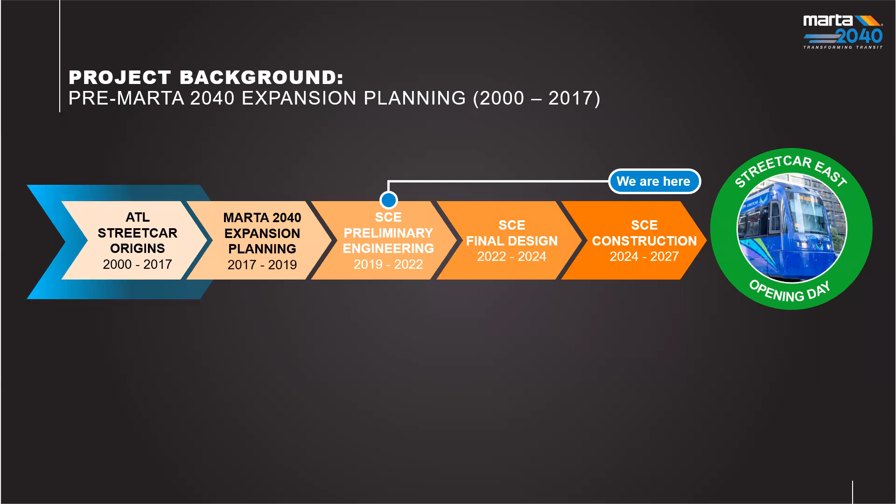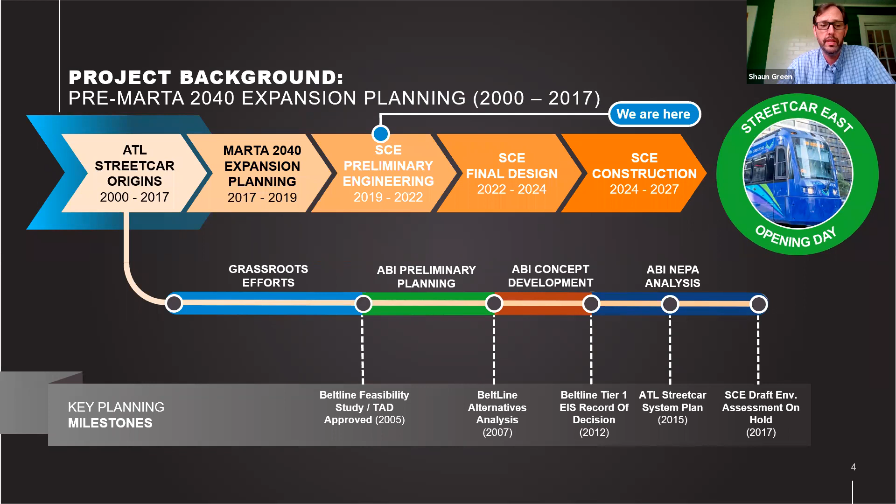It's kind of a busy slide, but there's a lot of information we wanted to make sure everybody understands as to what ABI is participating in. ABI is partnering with the City of Atlanta and MARTA on delivering this project. But to get where we are, we came from somewhere, and that's really what I want to talk about today.

It started off as a graduate student research thesis about 20 years ago. The project gained so much grassroots support that ultimately it became a policy of the City of Atlanta to implement the BeltLine program of projects. All of the BeltLine program of projects—the trails, the parks, the affordable housing, the jobs—all of that is hung off of the concept of the transit system. It's the spine, the fundamental element of the BeltLine program of projects.

We've done a bunch of feasibility studies and alternatives analysis. We did a lot of community involvement and engagement, and we still do all of that. But now we're working with MARTA specifically to get to the next part of this, which is now funded, and we're really, really excited about that.

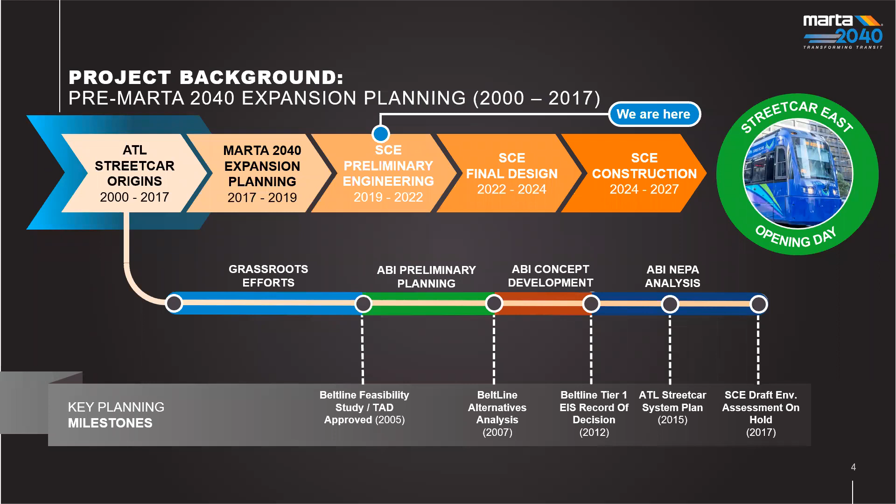So what I want to do now is move to some of the more recent events that have taken place. As many of you know, in 2016 a half-penny sales tax was passed, providing funding for many of the transit projects across the City of Atlanta. The Streetcar East Extension project was one of those projects eligible to receive funding.

Over the course of two years, MARTA has gone through a complex planning process which included significant public outreach to determine how the transit expansion program would be sequenced in a financially feasible way. It was through this process that the Streetcar East Expansion project was prioritized, and a funding plan was established to complete the project.

And that brings us where we are today. The Streetcar East project is currently in the preliminary engineering phase. During this time frame, MARTA has been in the process of validating all the previous work performed by COA, the City of Atlanta, and ABI on the project.

We have established a preferred alignment, a proposed preferred alignment for the project. We have also validated that the vehicle maintenance facility can accommodate the proposed expansion with some modifications. As you know, the current maintenance facility is not very large, but we do operate out of it, and it would have to be modified going forward.

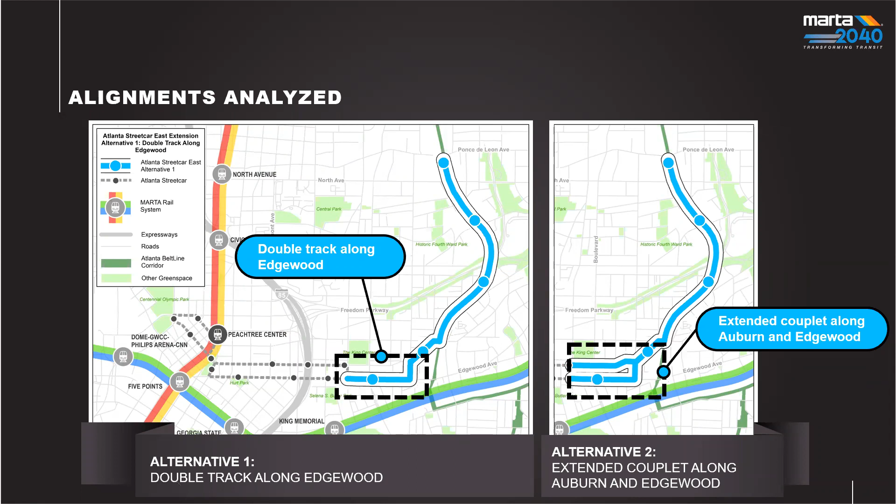Because we were early enough along in the process, we were able to take a relatively high level look at how these two projects compared. We were not so far along in detailed engineering, so this wasn't a 7-page analysis, but we were looking at things like stakeholder feedback. There are different turns, some tighter than others. Were we creating additional noise? Was one route particularly faster or slower than the other?

On a scale, were the two relatively similar or relatively different when it came to construction impacts? We had new information like underground utility surveys, so we had a better sense of whether you had a major fiber line close to the surface. And then even thinking about maintenance requirements - once you have significant turns, if you have too many things that differ between routes, you have to treat the vehicles differently than if all vehicles are doing the same thing. And relative costs - are they close enough to each other within a margin of error? A lot of times you'll see projects like this where one corridor could be extremely expensive, maybe because of a utility impact, or because you have to take significant right-of-way, a parcel or something like that.

Based on where we are with the analysis right now, we found that these two projects were relatively close to each other. Auburn Avenue and Edgewood Avenue are relatively similar city streets with relatively similar utilities underground. The costs are within a margin of error. The maintenance shows very similar movements between the two. Construction impacts - while we're not quite at the point of understanding how everything would be staged - are close enough to each other that one does not outweigh the other. You're still removing or impacting 2 lanes of traffic, and you can sequence it in very specific ways to help mitigate that.

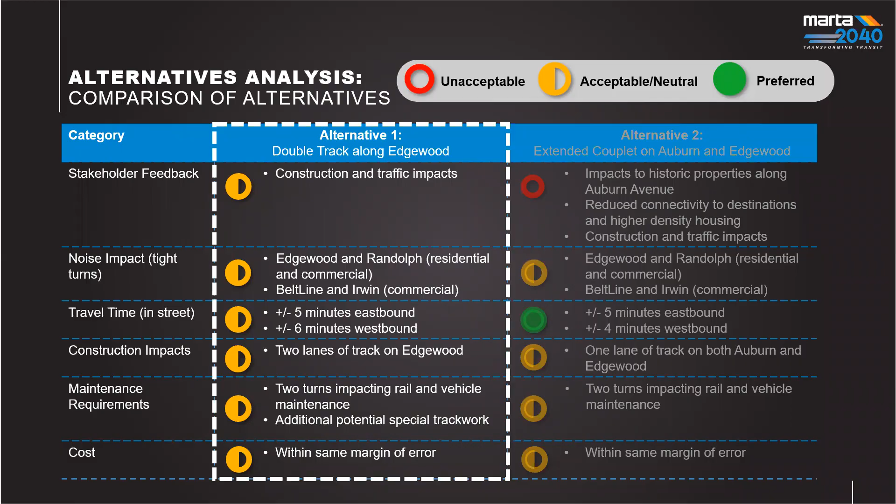Again, if you're going east from Jackson Street, you continue along Edgewood, go north on Randolph, continue northeast on Auburn, and then make that turn onto the BeltLine corridor, coming up to just around the Ponce City Market area, just south of Ponce de Leon.

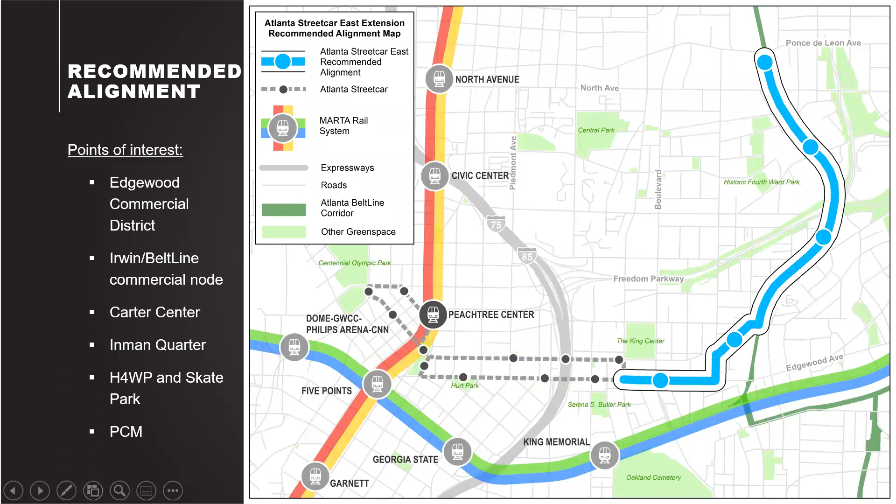We also took a look at how this alignment connected or didn't connect with the existing bus routes and other MARTA assets. What was interesting is it was relatively plainly clear that it doesn't overlap a lot. You only have 2 routes that literally touch each other from a planar perspective.

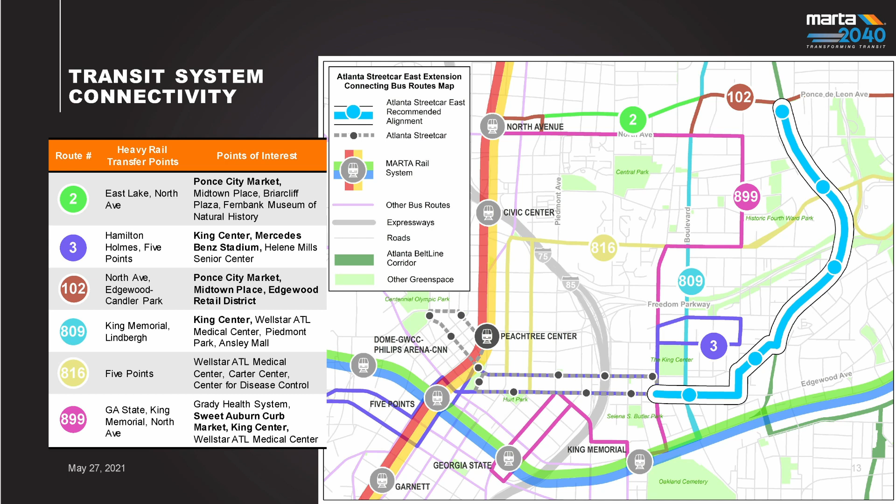The other issue, while a little weedy in technical nature, that Brian mentioned earlier, is we have verified that the existing footprint of the maintenance facility under 75/85 is sufficient to accommodate the extension of the Streetcar East Extension. That includes everything shown on the map previously, going all the way north to just south of Ponce. That's very important. It's not to say MARTA isn't continuing to think about other expansions of the vehicle maintenance facility, or even finding other facilities, depending on what the next expansion of the streetcar line is. But it is critical to say this is not a requirement. We do not have to expand this site to accommodate this extension.

So that could have been a pretty significant hurdle. I think the whole team was confident it would work, but we had to make sure that it would. We had to validate that so that we weren't a year or two down the line having to put the project on hold just for the sake of finding new real estate to store and maintain our vehicles.

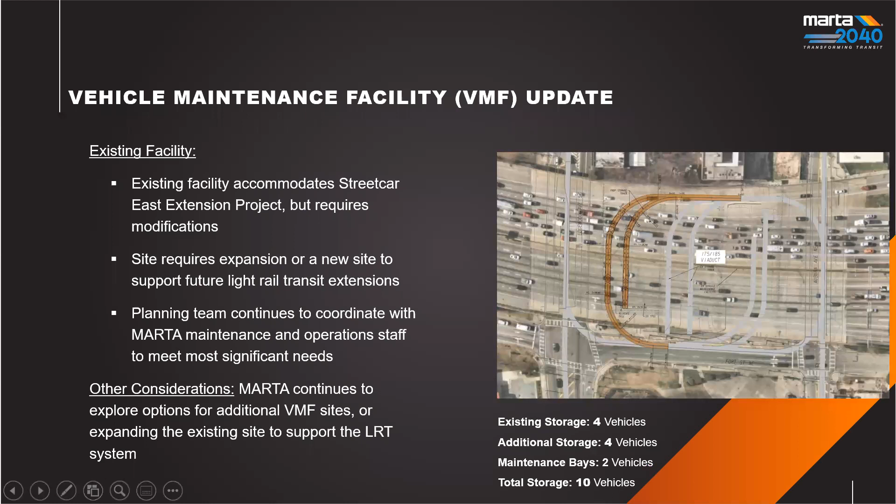Now, just fundamentally, we wanted to remind everyone that this project continues to meet the original intention of the BeltLine needs and modes. This also meets the original criteria set forth in partnership between the City of Atlanta and MARTA when the half-penny T-SPLOST was established. The priorities there for any of these projects were focusing on safety and increased access throughout the City of Atlanta, expanding mobility for all potential users, and extending the value of the existing streetcar.

While that wasn't an express guideline or guiding principle of the halfpenny projects, it's definitely something we've all heard from residents about the existing streetcar. We want to make sure that asset is leveraged and improved upon, but also that we're not just throwing a streetcar in the ground for the sake of it—that this project really reacts to projected growth and development along the corridor, connecting folks that live in town at higher densities to higher density areas that have jobs and destinations like downtown Atlanta.

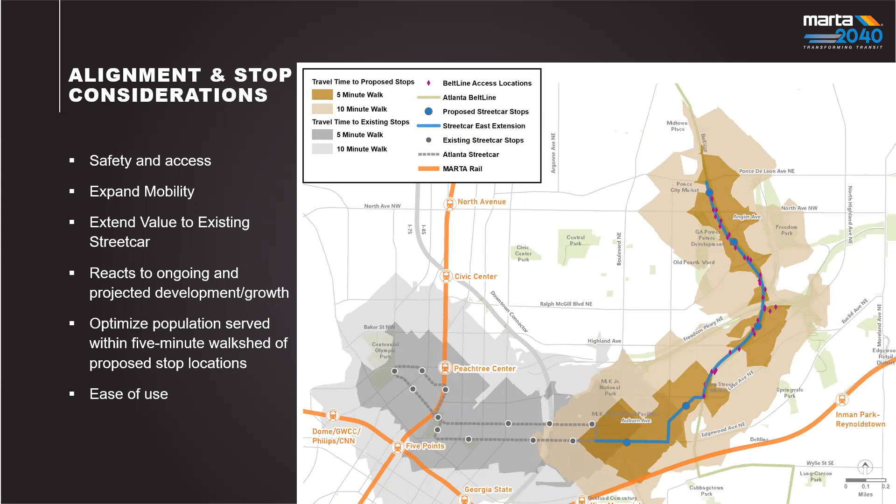Brian mentioned that we'll be asking in the survey some quantitative and ranked questions about where you'd like to see stations and stops. These stops will generally have the same level of design that we might see on the existing streetcar right now, particularly along Edgewood and Auburn. We do not yet have the details of what those station area designs will look like beyond that indicator. We also haven't decided if the streetcar station areas will look particularly different along the BeltLine or not.

They have continued to be designed for the ability to extend those streetcars to that larger double car configuration along the BeltLine, similar to their original assumptions that one day this could have the higher densities that would support two trains instead of just one.

The stations were focused on ongoing and projected development and growth. We did think about where the buses were, but we also overlaid that walk shed to make sure that what exists, and where people can access the corridor, can continue to access stops. We've also continued to think about how the BeltLine is currently used and the in-street area, particularly around the Edgewood Commercial District—placemaking, potential art siting, and other amenities.

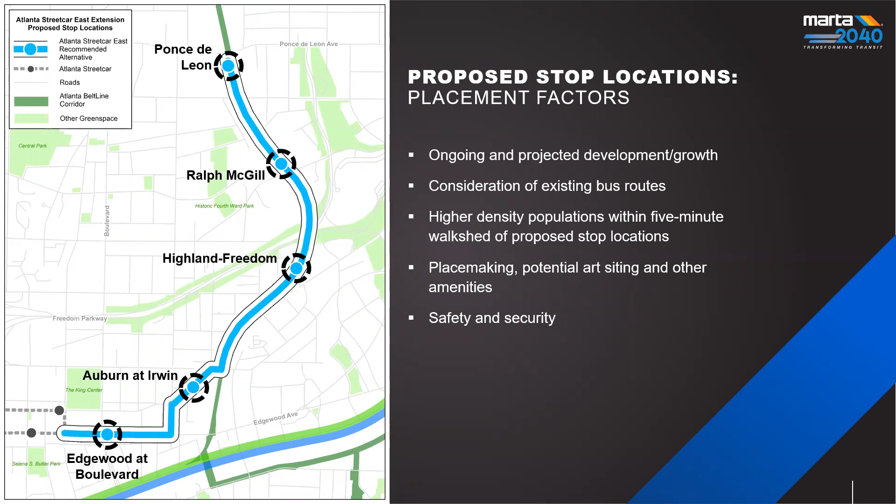We are also assuming a 10 to 15 minute headway, which means if you miss a train by 10 seconds—you get to a stop and that train pulls away as you're entering—you will have to wait no more than 9 minutes and 50 seconds, or 14 minutes and 50 seconds, until the next train shows up.

So we're playing around with these ideas of 10 to 15 minute headways to determine how many vehicles we need, and the cost to operate and maintain the system over its lifespan. It's very important, but MARTA's guidelines for this type of service do not go beyond that 15-minute headway. So they continue to work on the existing streetcar system too, to try and figure out how we might be able to start seeing similar headways there.

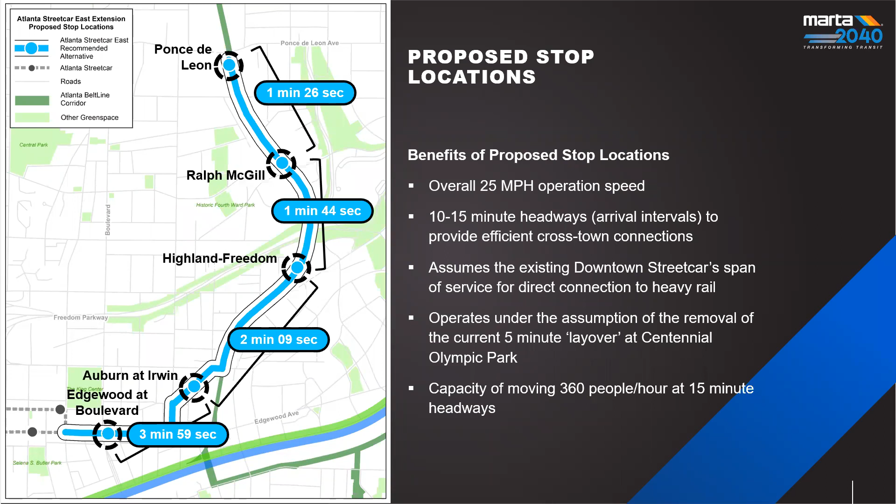And some of this, there's sort of the devil in the details on that operating side of things as well—where these vehicles lay over, where they switch drivers, things like that. Those are all going to be very much a part of those early stages of design as we go through the next 12 to 18 months.

So over the next couple of slides, I'm going to start looking in a little bit more detail at the cross sections. I'll start with areas zoomed in along the Beltline, and a plan view, looking aerially down at the alignment.

We are still very early on in the process, so there are a lot of things you'll hear me say we're still figuring out. Part of this is we want you to know what we're still figuring out, and we want you to tell us how you feel about that. If you have any initial thoughts or ideas, they're always welcome, but really this is about getting you ready for the next round of engagement. That will be in the fall timeframe of this year, so it won't be too long before we come back out to the community to talk and give you more defined options. We just wanted to make sure you understood where we are, what we're thinking about, and how things might have changed since the last time you heard from ABI.

I am going to pause a little bit, particularly on these plan view slides, to give you an opportunity to digest it in front of your computer. I know there are a lot of questions that have already come in today and over the last couple of weeks. So if you don't hear me speak for a second, that's only because I want you to have an opportunity to see it, think about it, and jot down any notes for yourself if you want to.

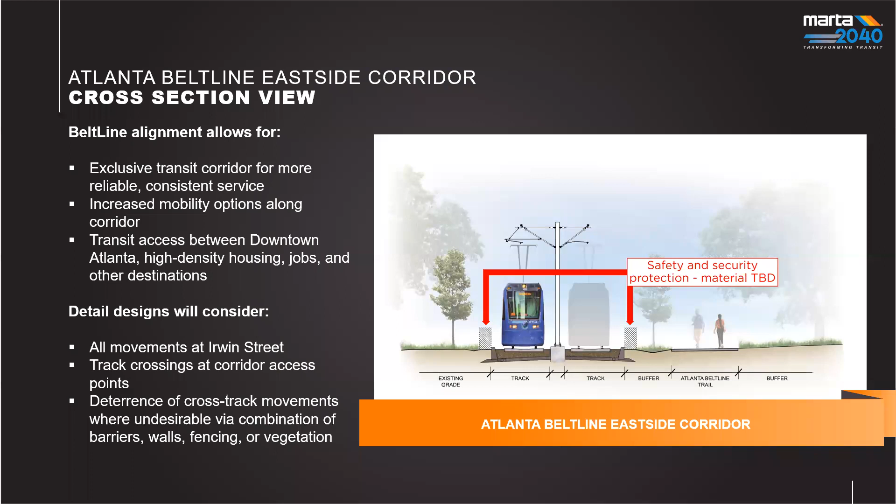But we also want to be very direct with the community. Like Brian said, there are going to be changes to the environment on the Beltline corridor. You're going to see more controlled access to the development surrounding it, particularly on the west side. You'll have limited access to the stairs at North Avenue, and impacts to what you're used to seeing, both from the shed at Ponce City Market and from the trail into town. Right now we're still assuming similar technology, this is a streetcar, you're going to have those overhead electrical poles. The views are just going to be a little bit different.

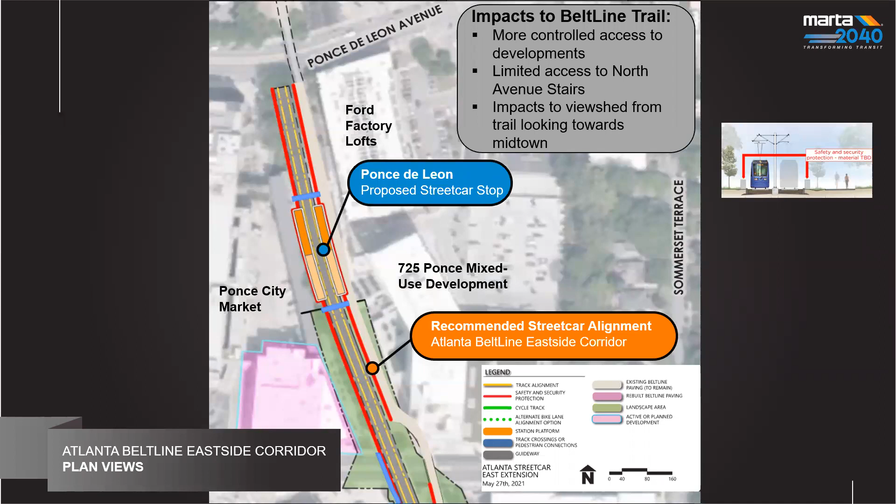We used to have the large ramp from the trail down to the Beltline. I know New City has been constructing, I believe they've finished construction of the new access point to accommodate their new development, but it will be a little more controlled than before. Impacts to the view shed similarly, you're still going to have transit between the trail and Fourth Ward, but you'll also have a very different view because of adjacent development. So there's a lot of changes happening, not only affiliated with building transit on the Beltline corridor.

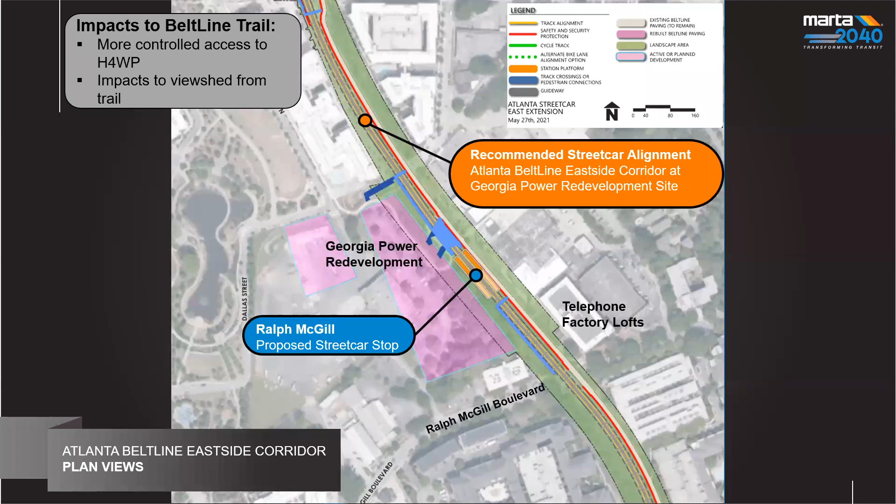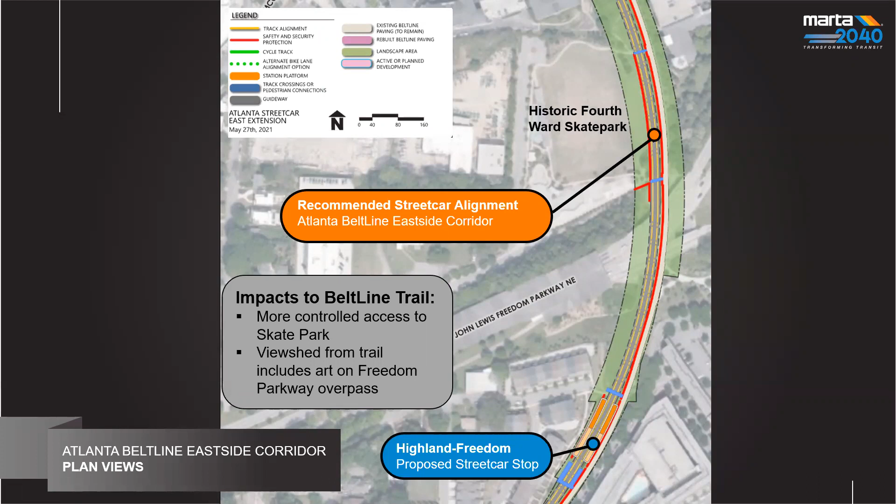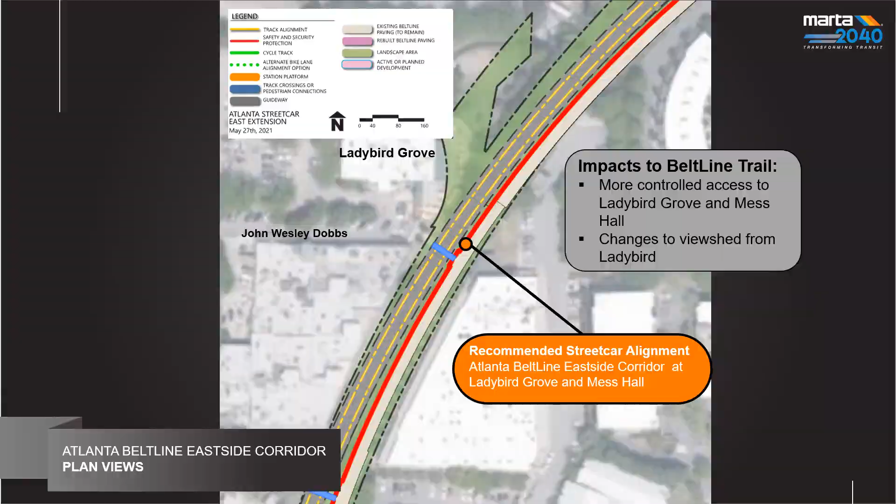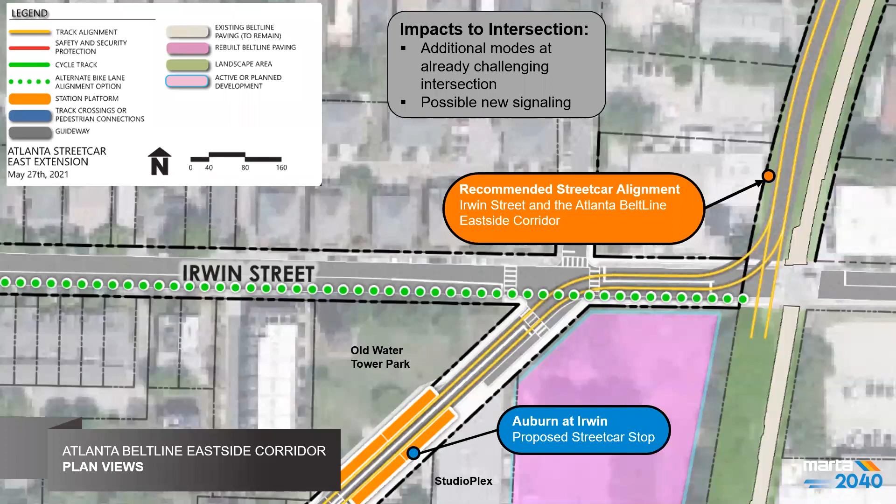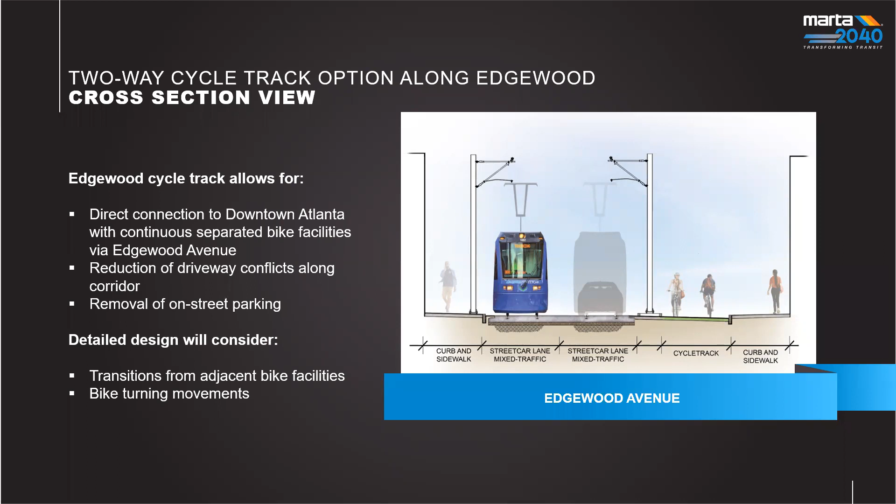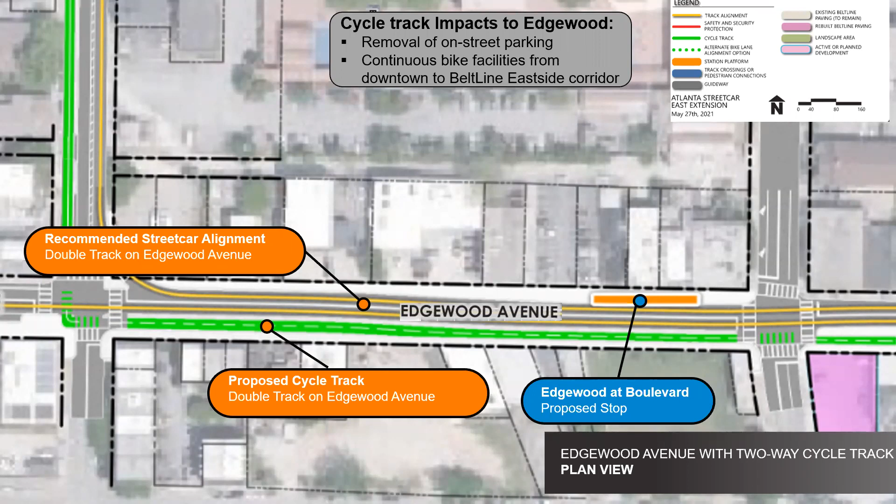It's a very interesting concept that actually started coming to this team's mind after we understood that the city was very interested in shifting priorities along this corridor, finding ways to either widen the sidewalk or reprioritize with striping in the near term. How do you reprioritize and protect those pedestrians and cyclists along such a busy corridor from folks that are not just in a car? So again, this is another section where we've asked, do you support reducing, limiting, or removing access to certain blocks from cars? In the survey, there is an option to say, I do not support this. We definitely appreciate that there are going to be a lot of strong opinions about this. A lot of this is coming from interest in the safety of all users.

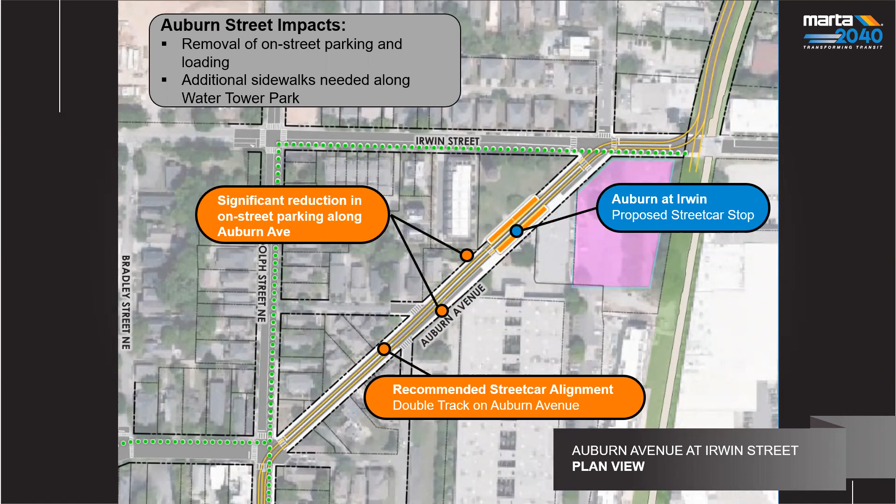It reduces on-street parking along Edgewood, but doesn't essentially eliminate it along the blocks where it's implemented — or it doesn't have to eliminate it. It could create a conflict zone on Auburn in the visitor bus loading area. This is currently unallocated space that is used by the King Center for loading and unloading tour buses.

So if you are traveling eastbound on Auburn on your bike, you want to make sure that it is clear for both bus drivers and cyclists — who's going where and when. But as I mentioned, that also creates a slightly less direct connection to the BeltLine corridor itself. Usually cyclists, if there's not a clear direction, make the direction they're most comfortable with. So there's just a little bit of unknown — there's not going to be a consistent way that everyone goes and gains access to the BeltLine.

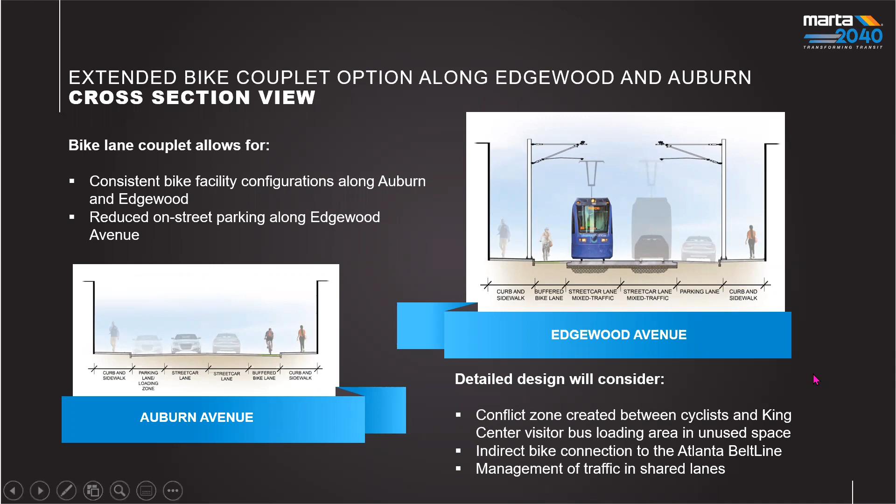Similar to the other plan views, it's just not as zoomed in, but I wanted to highlight that what's in here is a concept, not fully vetted, not all of the design details are figured out.

You'll notice, and I apologize if you're not seeing this, but we're showing the idea of on-street parking here along Auburn. This would be one lane in either direction, and then a bike lane heading east. Again, nothing is written in stone. This is just a very easy way for us designers to understand what space is available. You have pretty standard widths, and within what is available we've laid this out to accommodate cars as well as some parking, maybe some loading and unloading, and a bike lane.

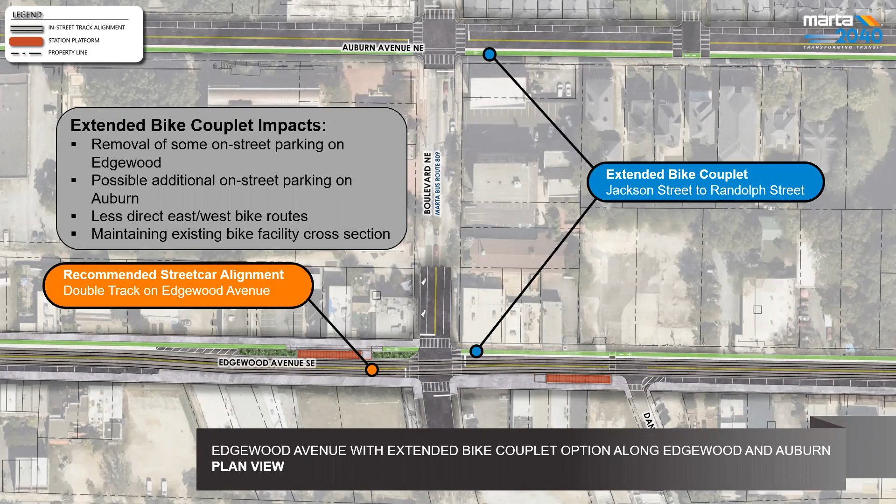All right, so I hope that sparked a lot of good questions from you all. So what I'll do now is talk about the path forward and where we're going before we jump into the Q&A section.

So if you look on the screen here, as you have heard, we will continue our work over the next 12 to 18 months to complete preliminary engineering. By the time we are ready to transition this project to final design, we would have completed many things and determined items such as stop locations, the VMF layout, and in-street, in-corridor cross sections.

We will have an expectation of the barriers between the trail and transit, which are adjacent to the properties, from GDOT. We also will have conceptual typical stop area layouts, as well as plans centered around safety and security. We'll also have some stormwater plans, and we will know a little more about the electrification of the transit system going through the trail area.

Now, so as you can imagine, receiving your input from today and going forward is very important. There are still a lot of decisions that are not finalized. We're moving, we've designed a lot, we've looked at a lot, but there's a lot that hasn't been finalized. So your input from today is very important. I implore you to go and take our survey before June 30th.